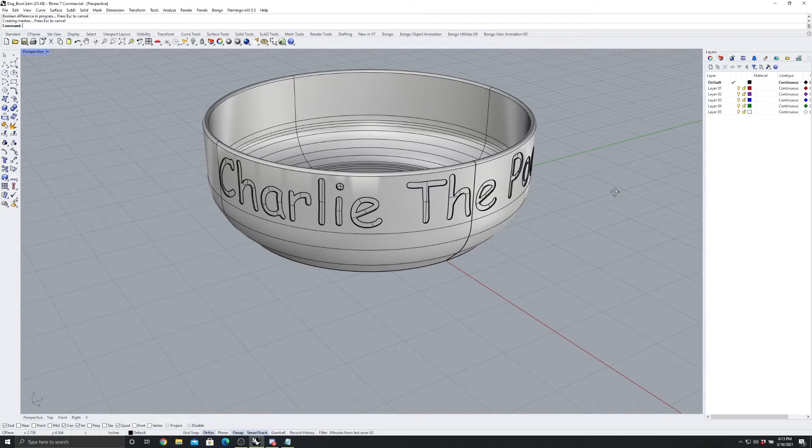Okay, so today I'm going to be making a 3D printable dog or cat bowl in Rhinoceros 3D. I want to include a custom name etched on the side, so if anybody wants to print their pet a new custom food or water bowl, all they have to do is follow this tutorial and they'll have the files they need to print one.

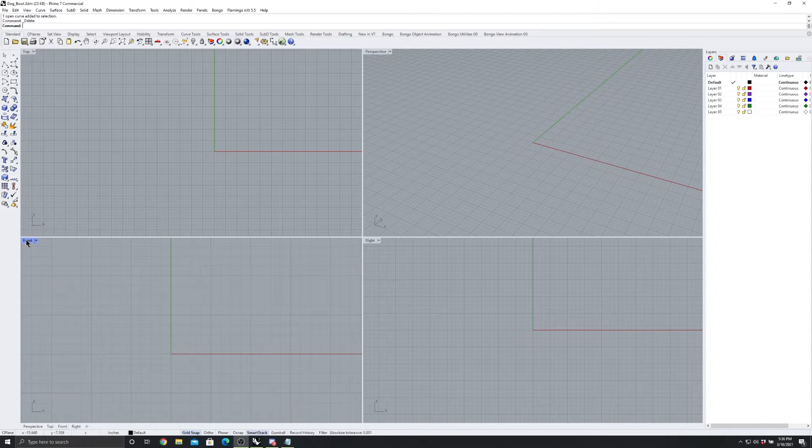I'm going to start by drawing half a cross section, so let's maximize our front view here. I want to make this bowl about 6 inches wide and 2 inches tall. I've got my graph plane set up in inches with 1/4 inch subunits. Let's start with a control point curve. So come up here and click control point curve. Start at the origin, and then I'd say about 2 inches over, make another point, and then another point.

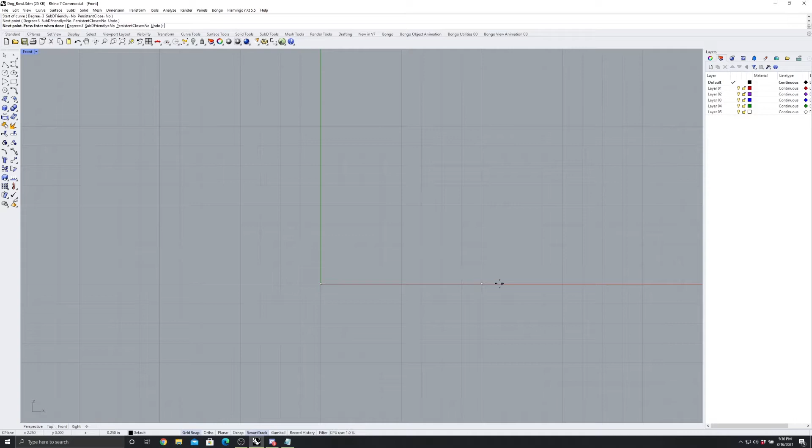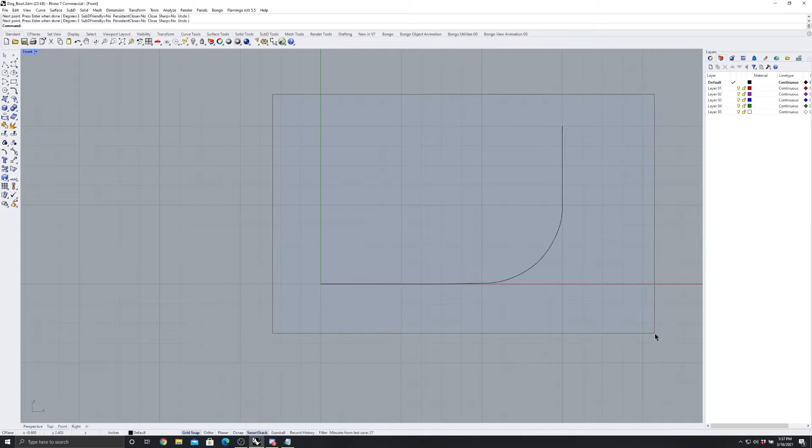Then come up about 1/2 inch over and 1/4 inch up. Then about here, and then I'm going to make 3 points in a row here, and then I'm going to bring it up to the top about 2 inches up. So let's press enter. So this is going to be the outer wall of my cross section. What I'm going to do next is offset this curve to my thickness. So come over here to curve, click offset, offset curve.

All right, so now it wants to know up here, side to offset, this side, and we've got to make sure the distance is what we want. I think 0.1 is what we want, and it's already set to that, but just to show you how to set it, all you have to do is type 0.1 and press enter. That sets this setting right here, and then you click which side of the line you want to offset. That creates two sides of this bowl, the inner surface and the outer surface.

I'm going to round this right here, and the easiest way to do that is to create a diameter circle. So hold down your circle menu button and then come over here and click circle, a diameter circle, making sure that your O-snap is enabled and your end feature of O-snap is enabled. Draw your diameter circle from end to end, like that.

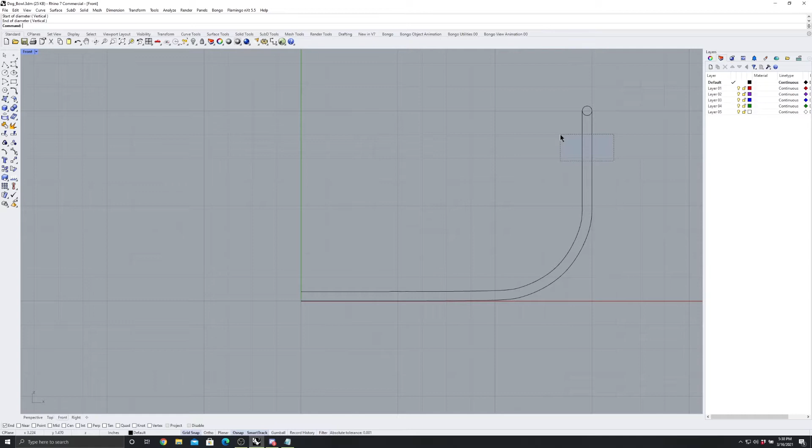And now, to get rid of that inner circle, select both of these lines, both the inner and outer wall of your cross section. Come over here and press trim, and then trim that half of the circle, and press enter. So, we now have a cross section of our bowl. If I were to use this cross section to create a bowl, it would come off looking great, but there's one problem. If I were to make a bowl from this cross section, I could not 3D print it. And the reason is this right here. This overhang right here is a problem.

You have to remember that when you're creating a 3D printed part, a 3D printer cannot print plastic onto thin air. And this overhang would present a problem if I were to try and have a 3D printer make this object. So I am going to reduce this overhang. I like to limit my overhangs to about 45 degrees. I know a lot of printers can go steeper than that, but I have always had success and have never really found it that significant a limiting factor to reduce my overhangs to about 45 degrees.

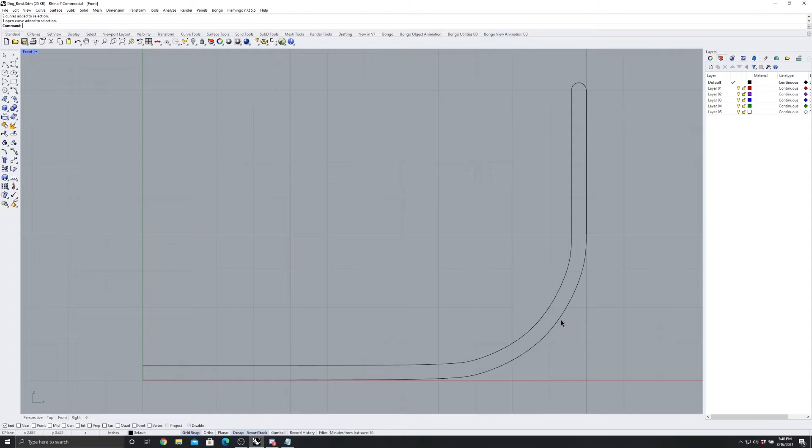This is the bottom, and I want to make sure that the steepness of this outer curve here, not the inner curve, but the outer curve, does not exceed 45 degrees. So how do I do that? I'm going to start by coming up here to Polyline, and I'm going to create a polyline that is at a 45 degree angle. And that's really simple to do. All you have to do is take one of these inch boxes and draw a line from corner to corner. That line is at 45 degrees.

And then come up here to move, and then select the end of this line. What we want to do is to combine it with the tangent of this line, but it's not snapping. And the reason is, if we come down to our O-snap menu, we have to click tangent object snap. Now when we bring our cursor over, it snaps directly to the tangent of this curve. And that's exactly what we want. I'm going to click.

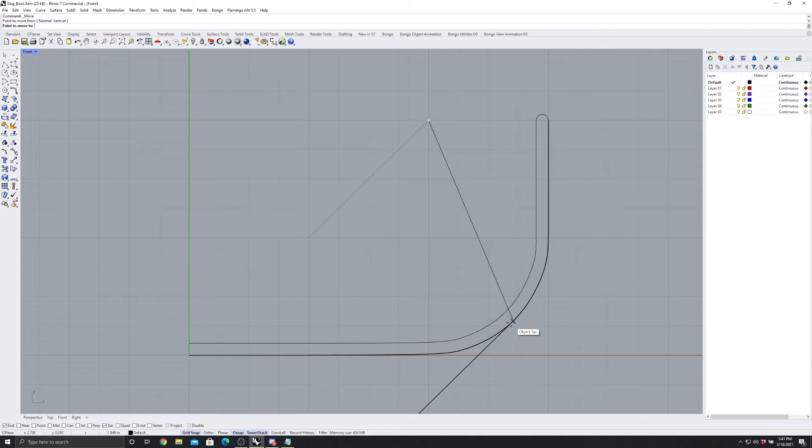Now we need to bring this line over and trim at this intersection here. How I'm going to do this is select this line here, and then I'm going to trim all of this away. I don't need it. I'm going to click Trim here, trim, and just completely get rid of that line.

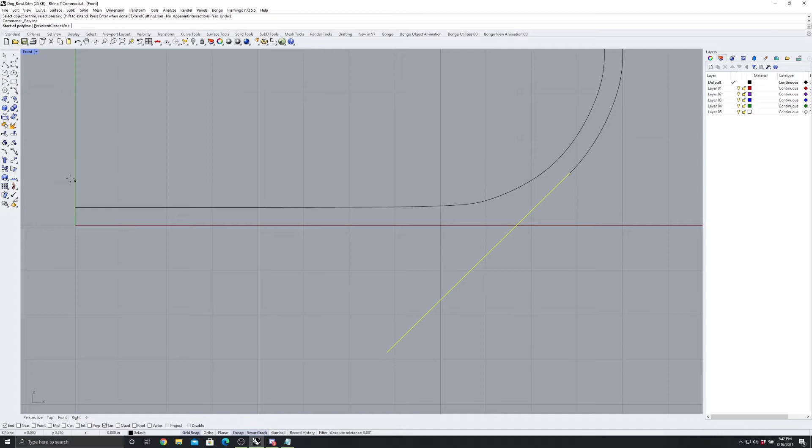And then I'm going to draw a new polyline by clicking here. I'm going to start at the origin and bring it over and past here so that these two lines intersect. Now I can trim them so that they join. I'm going to come over here and press Trim. I'm going to click here and click here.

Now what I've done to my cross section is, if I were to revolve this cross section into a 3D object, it would now be 3D printable because this overhang no longer exceeds 45 degrees. Let's turn this cross section into a solid line.

Right now it's not a solid line, it's in segments. You can select individual segments. Let's turn it into a solid line by coming over here and pressing Join. Now we have one solid cross section.

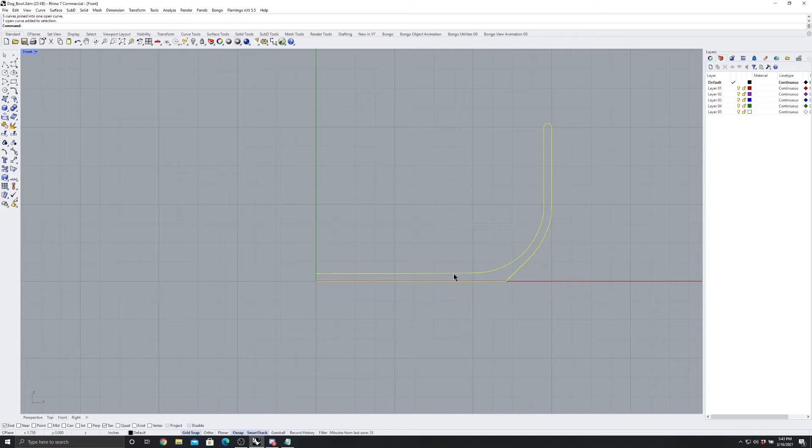Something that I forgot to mention is that when you are drawing the control points for this outer line here, make sure that this segment of the bowl right here is perfectly vertical. The reason is you're going to be etching letters into the side of the bowl, and keeping it vertical makes that process simple.

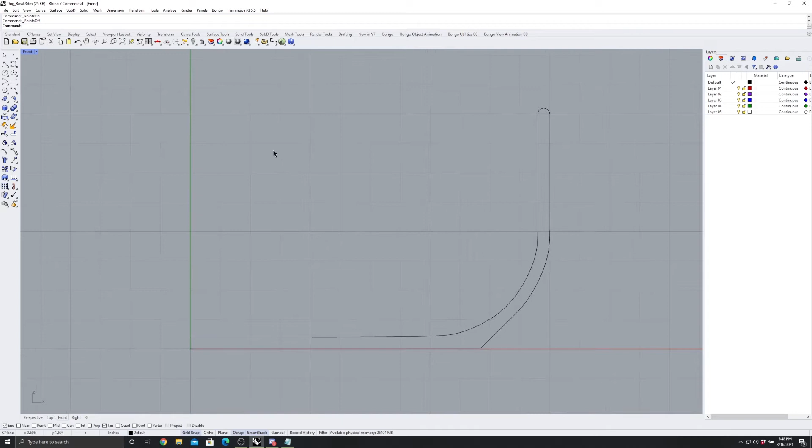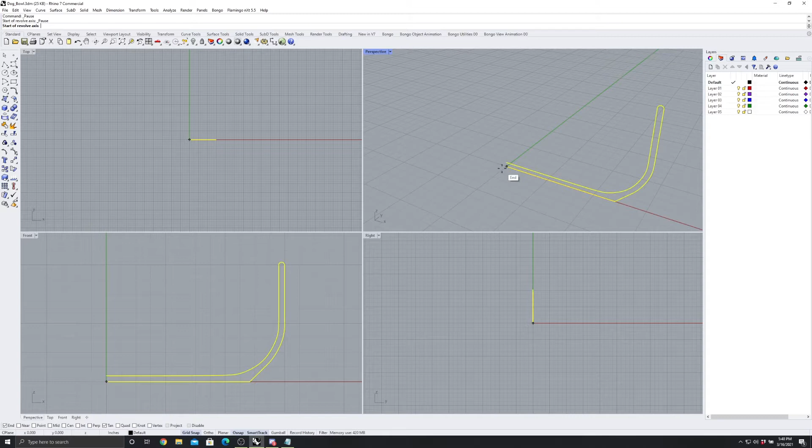Okay, the next step is to revolve this cross section. We're going to do that by exiting the front view and making sure our perspective view is easily visible. Then we're going to select our line, come up to Surface, and come down to Revolve. The first thing it's going to want you to do when revolving a polyline is to define the axis of rotation. So that's pretty easy to do.

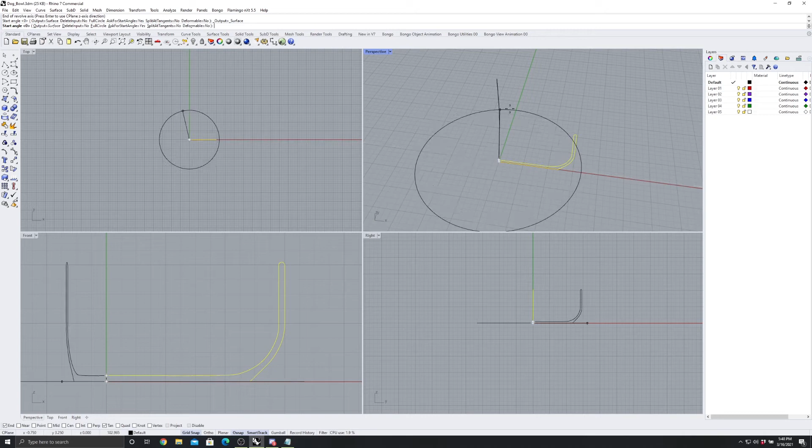Making sure that the end option is enabled in your OSnap, just select the two ends of this line right here. End, end. The next step is it wants you to define the starting angle of the rotation. By default, it should be 0. Mine is 0 by default here. But if yours is not, just press 0 and then enter.

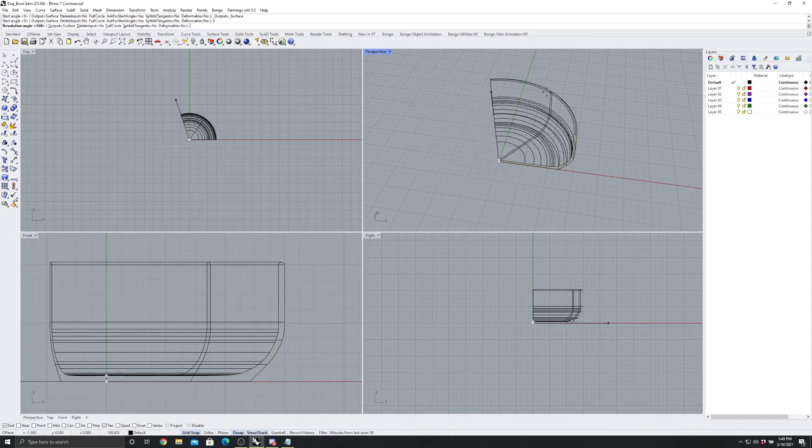Now it wants you to define the revolution angle. In other words, how much of a revolution do you want? We want a full revolution since we're making a bowl, not 3/4 of a bowl or half a bowl, but a full bowl. So we define our revolution angle as 360 degrees by punching in 360 and then enter. We now have our bowl in 3D space.

So that you can better see it, I am going to come up here and press Shade Viewport, making sure that my perspective viewport is selected. I'm going to click this button here, Shaded Viewport. Now you can clearly see the bowl we have just made.

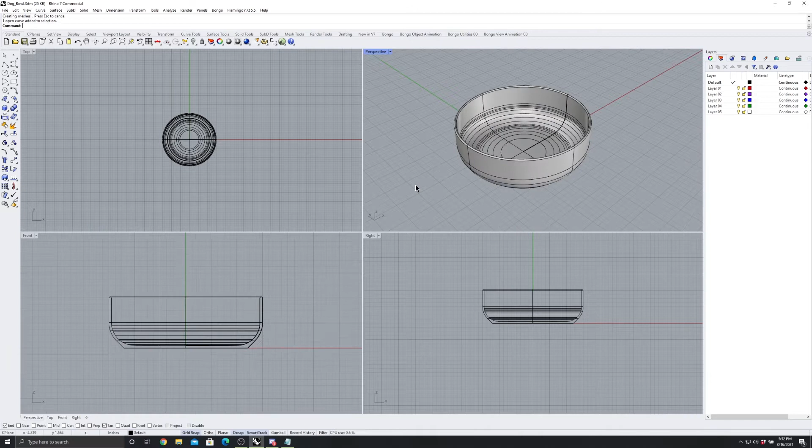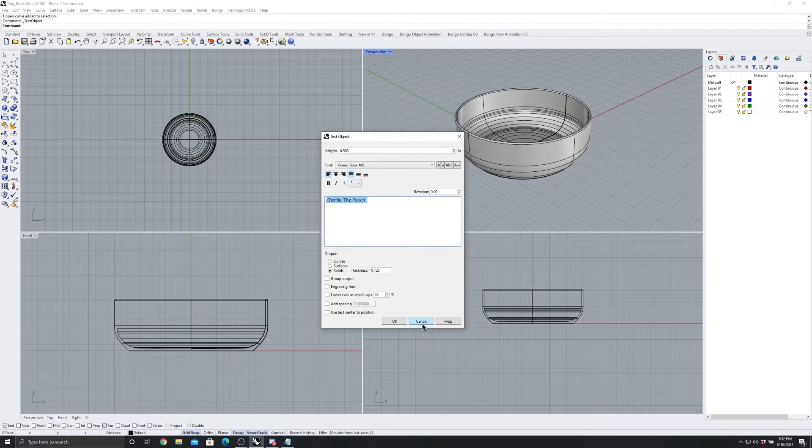The next step is to create our letters that we are going to etch into the side of this bowl. We do that by coming up to the Solid menu and pressing Text. In this menu, you can select a particular font and the height. This is important, the height of the letters. I'm going to cancel out of this and explain to you why height is important.

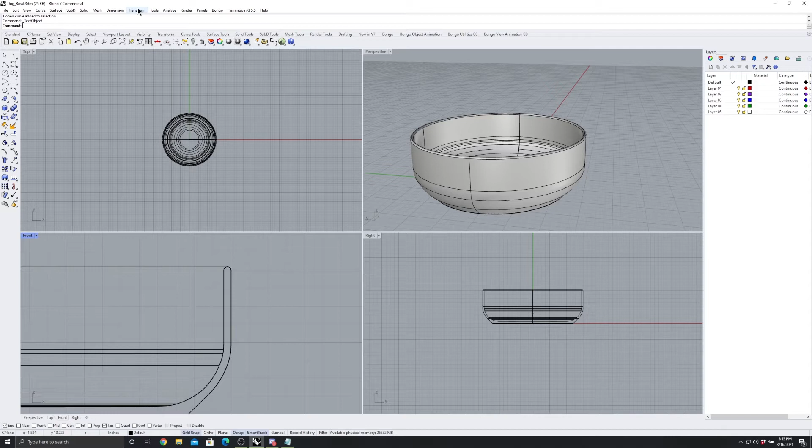This flat area of the bowl is 1 inch tall. You can tell by the graph it's a little under 1 inch tall. So we need to confine our letters in this flat area and not go any further below this point right here. Since it's 1 inch, to give us some space, I am going to make my letters about 3/4 of an inch tall. So come over to Solid, Text, and set the height to 0.75, 3/4 of an inch tall.

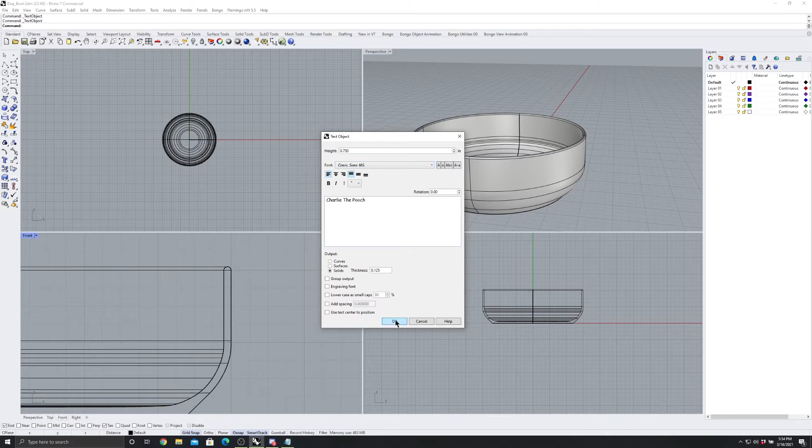For the name, I have Charlie the Pooch already set up here, so I think I'm going to keep that. For a font, I'm going to do Comic Sans. No particular reason, I just have to choose off the cuff. And now, as you can see, it has created our text in physical form. So let's place it really anywhere next to our bowl.

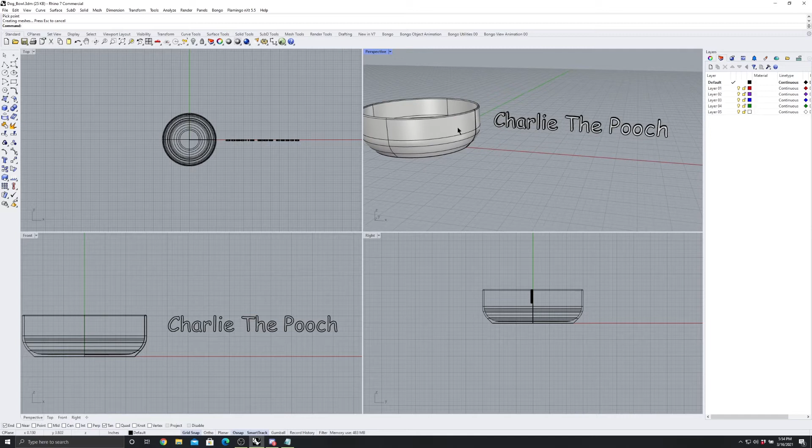If you come up here to the perspective, you can see our letters floating in space next to our bowl. The next step is going to be to bend them around the outside of the bowl and then subtract them from the surface of the bowl, in other words, etch them into the surface of the bowl.

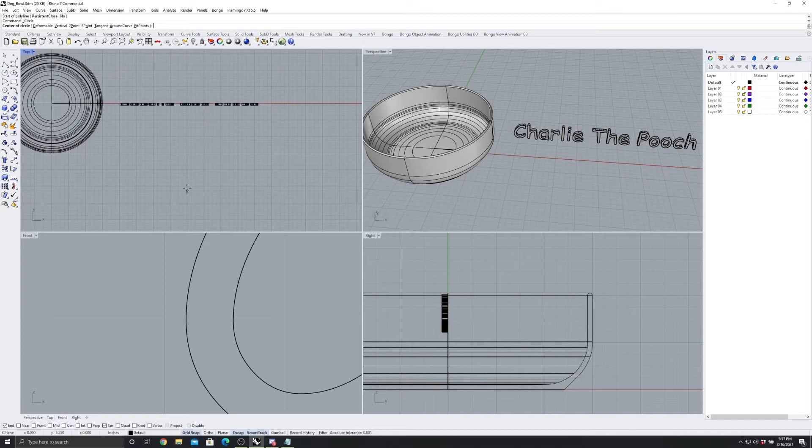In order to bend these letters around our bowl, we're going to need two pieces of information. We need to know the outside diameter of this bowl. I happen to know that it is exactly 6 inches, since I drew the cross section exactly 3 inches from the middle. 3 times 2 is 6. So let us draw a circle that is exactly 6 inches in diameter.

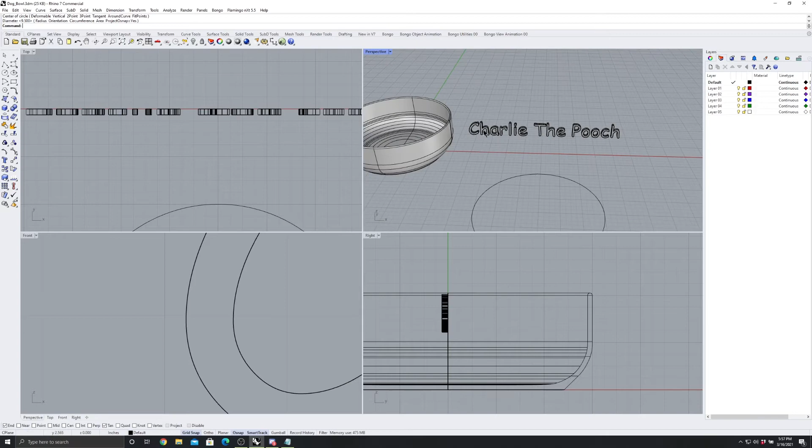The next bit of information we need is the exact length of these letters. This is a little bit tricky because you need to capture the furthest point of the right side of the H here and the furthest point on the left side of the C here, determine that length, and draw a line that represents it.

So I'm going to come over here to Polyline and switch to the top view. I'm going to draw lines that come out from the furthest points on both the C over here and the H over here. I like to use the Quadrant object snap feature of OSnap for this. So let's select that.

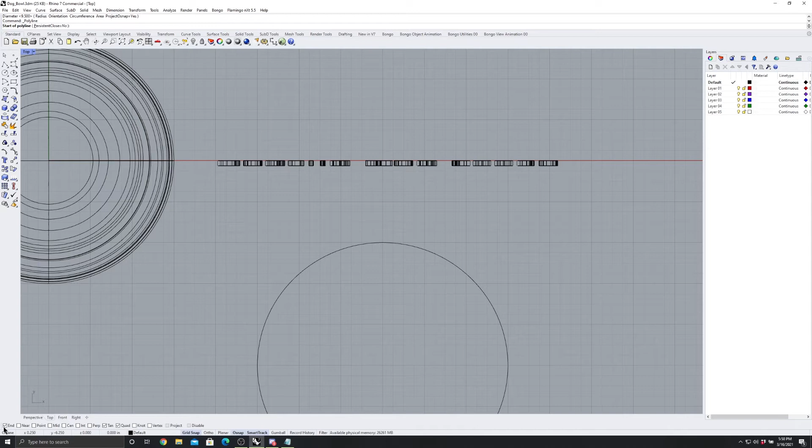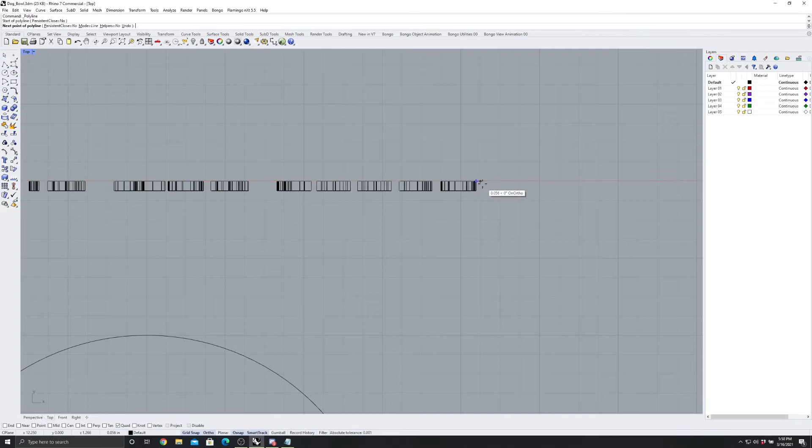I'll unselect end and tangent because I don't want to accidentally select anywhere else. If you come here, Quadrant will grab that exact point, the furthest point right on the H. Let's grab that point, and with ortho enabled, bring a line out to about 3/4 away from the origin. Then over here, let's do the exact same thing, using our quadrant feature, draw a line about 3/4 away from the origin plane. So now we've drawn two lines that represent the entire length of these words.

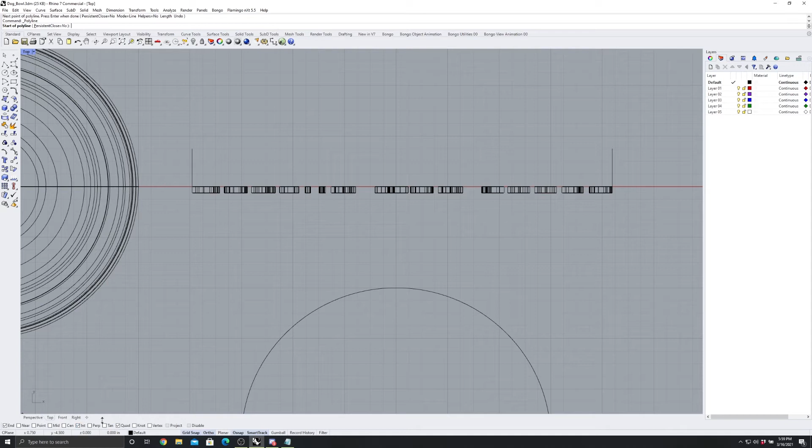Now what we need is a line that is an accurate length between these 2 points, and that's quite simple. You draw a polyline up here. Make sure your end feature is enabled in OSnap, and also intersection object snap is enabled. Then from the end of this line, come over - for this part I am not going to use end, I'm going to make sure I use intersection or apparent intersection, and click.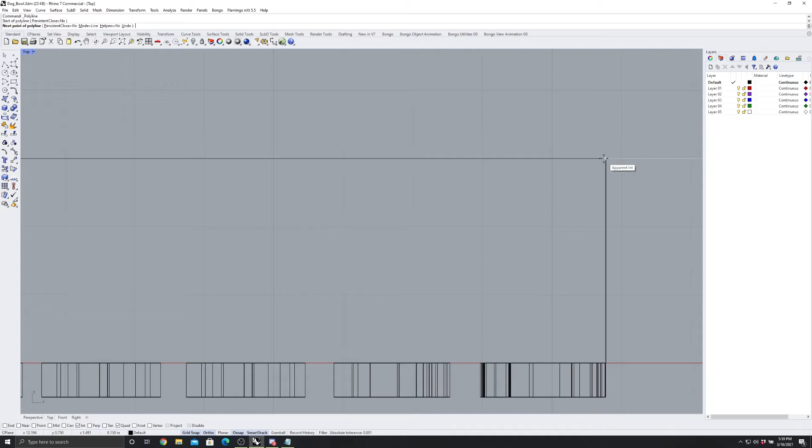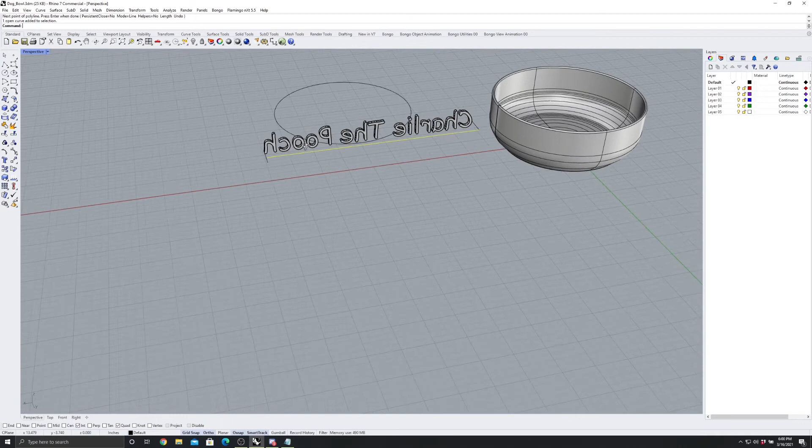Now, if I exit my top perspective and enter my universal perspective, I can see that this line here that I just drew perfectly represents the total length of these letters. So I now have the two pieces of information I need to start the bend.

I'm going to delete these lines since I no longer need them. Then I'm going to bring this line over, and move the end of this line, with my quadrant re-enabled. Just to be clear, what quadrant does is allow you to snap to 4 locations on this circle where it is parallel with the X and Y plane. You see how that works? It won't let me snap anywhere except here, here, and here - that is what quadrant does. Now I'm going to bring it down here, this is where I want to connect it.

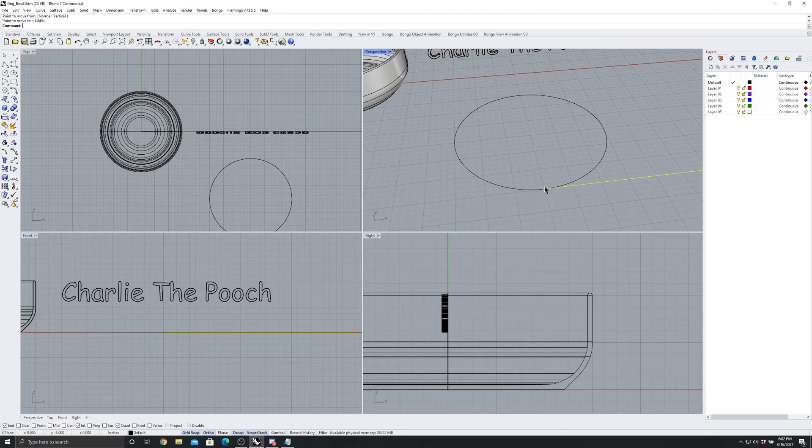Now what I need to do is determine the length of this line. I know the length of this line matches these letters over here, but I do not know exactly what that length is. To figure that out, you select it, come up here to Analyze, click Length, and it tells you exactly its length, 8.15 inches.

So in order to bend these, we need to create an arc here that is exactly the same length as this line, but along this circle rather than straight. I'll explain why this is important in a second, but for now let's create that arc by coming over to Arc, click it, and then we need to create the origin of our arc in the exact center of the circle, which is this point right here.

It just happens to be aligned with the graph, but if it wasn't, you can come down here to OSnap and click center, and that will allow you to snap to the center of any circle. If I come up next to the circle wall here, it snaps directly to the center of the circle. It's a very useful feature.

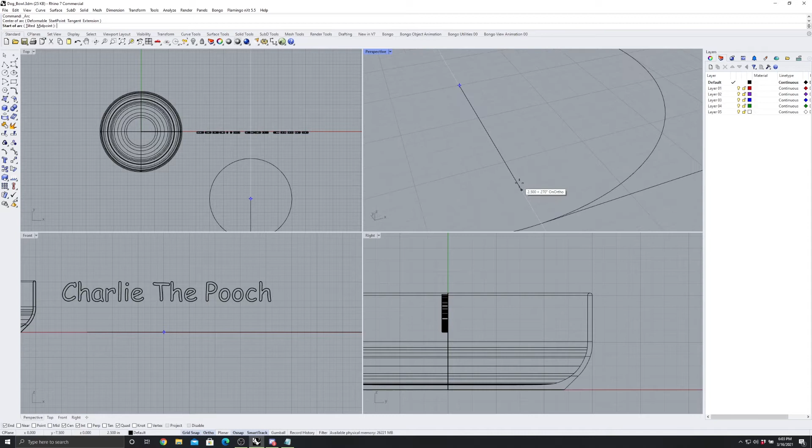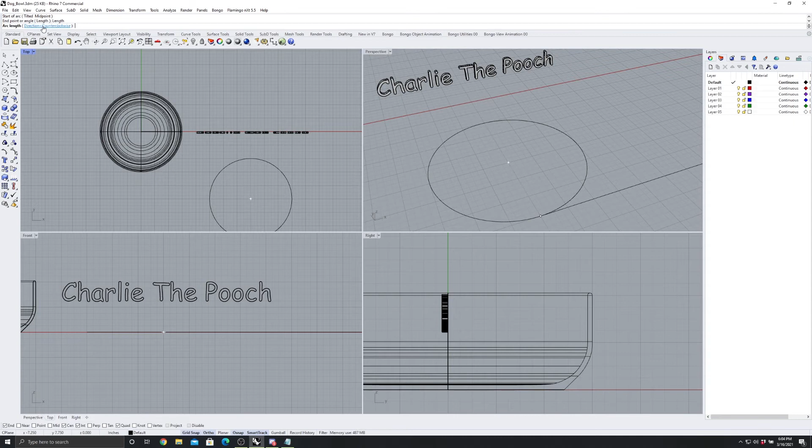Now, what we're doing here is defining the radius of the arc I'm about to create. The radius always comes from the center of a circle out to the side here - that is our radius, exactly 2.5 inches long. Now, the arc feature in this program is very useful because instead of defining the angle, 90 degrees, 180 degrees, you can give it an exact length. Let's click this length feature and type in the exact length of this line, which was 8.150 inches long, and press enter.

Now you can't see the arc because this circle is blocking it, but I don't need this circle anymore, so I'll get rid of it. There is our arc. This arced line and this straight line are exactly the same length.

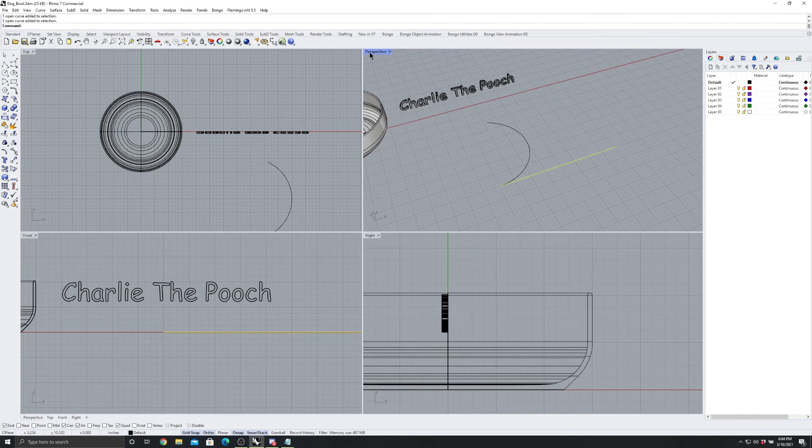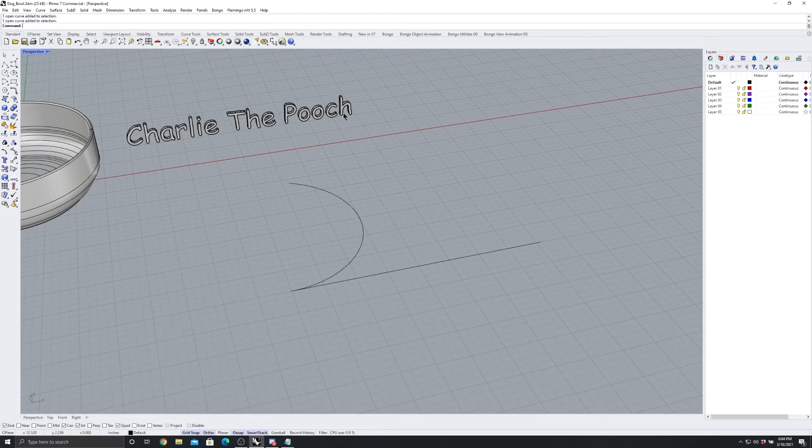Why I need these two lines is very important to the bend feature in this program. I'm going to maximize perspective so you can see this better. What these represent are where the spine of the bend is going to start and where the spine of the bend is going to end. I'm going to use these lines to perfectly define my bend and ensure that when I bend these letters, they will perfectly wrap around the outside surface of this bowl.

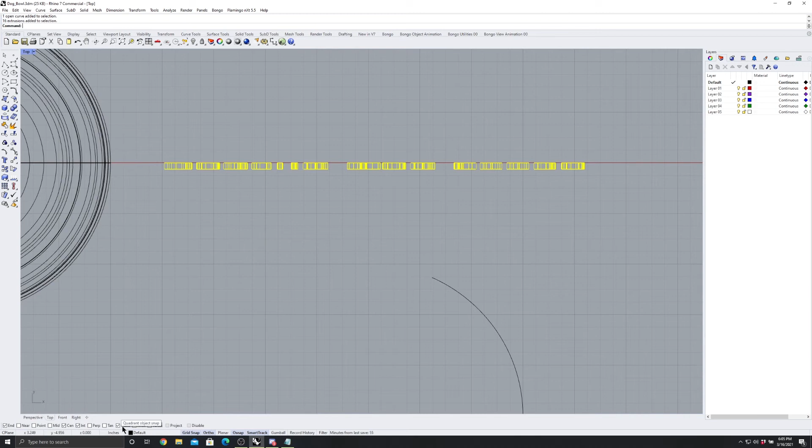So let us do that. Let me demonstrate the bend feature by exiting the perspective window and coming to the top window. I'm going to grab the furthest to the left point using my quad feature. I'm going to come up here to Transform, Move, and then select this corner here. I've got to be careful - I do not want end, and I do not want intersect or center for that matter. I'm just going to leave quad enabled, quadrant.

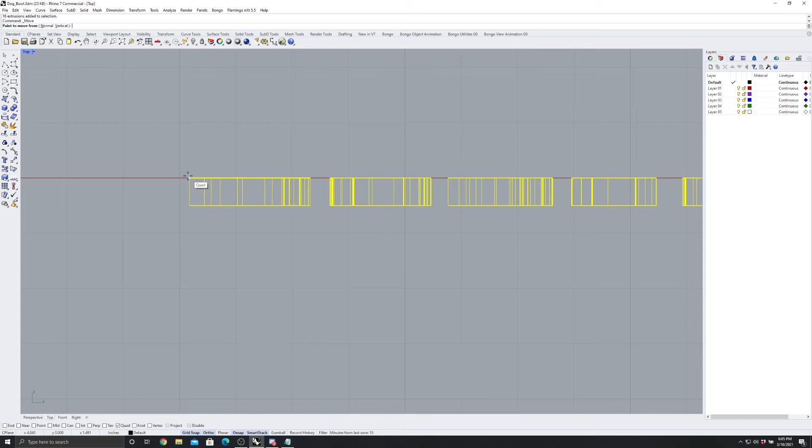I'm going to select the quadrant of this letter, which I happen to know is the furthest point to the left of this entire string of letters. Click, and I'm going to move it to this intersection of the two lines I drew.

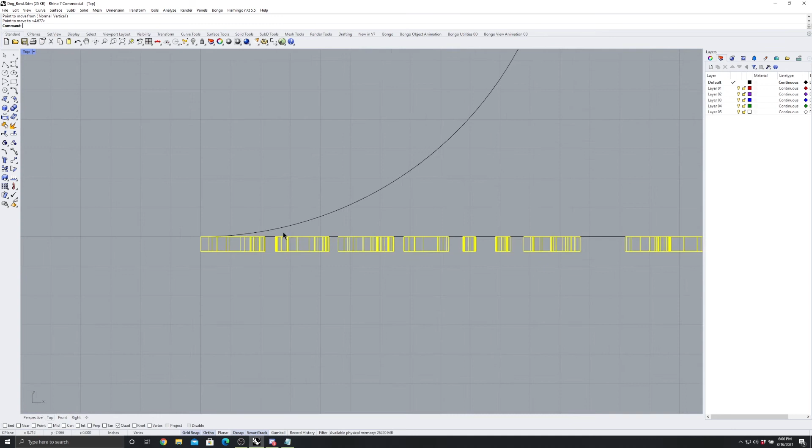Now, before I bend it, I have to consider something. How far do I want these letters to etch into this bowl? What is the depth of the etch? It's got to be very shallow because you do not want to create a perfectly flat overhang that a 3D printer can't manage. I'll explain what I mean by that in a second.

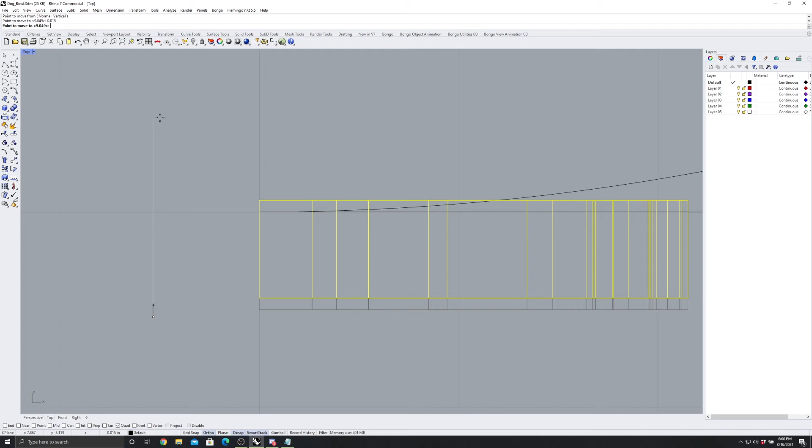Let's see, I'm going to go with a value that is really small, that will show up but will not create a problem for our 3D printer. I'm going to get rid of grid snap and enable ortho snap. Probably about 0.015, I'd say. So instead of trying to click on 0.015, I'm going to type in 0.015 and press enter. Now, with ortho enabled, I will essentially move these letters back 0.015. They should be 0.015 inches in from this line here where it started.

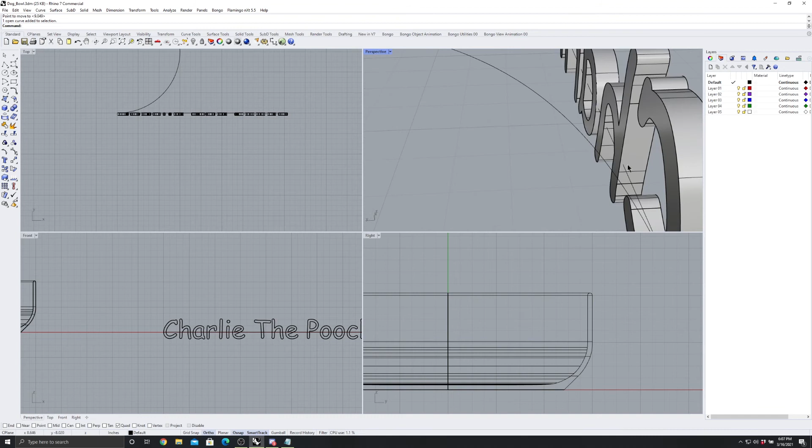So I'm going to move back to 3D space and show you what that means from this perspective so you may understand better. You'll notice that I moved the sides of these letters in this little amount here, which is 0.015 inward. All right, now I'm going to go back to top and we're going to commence the bend.

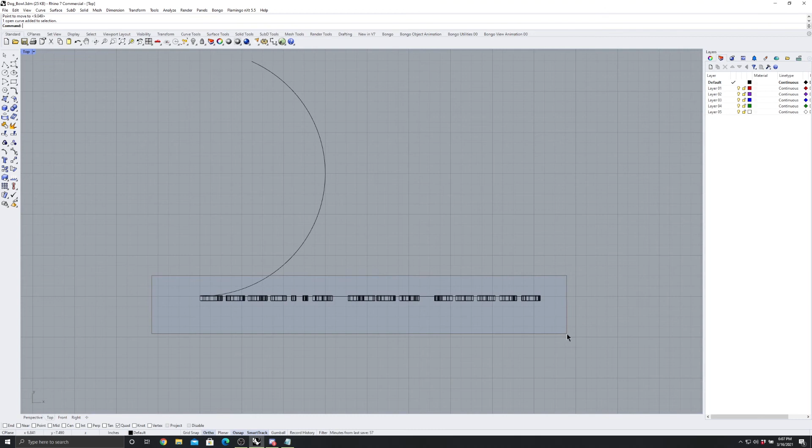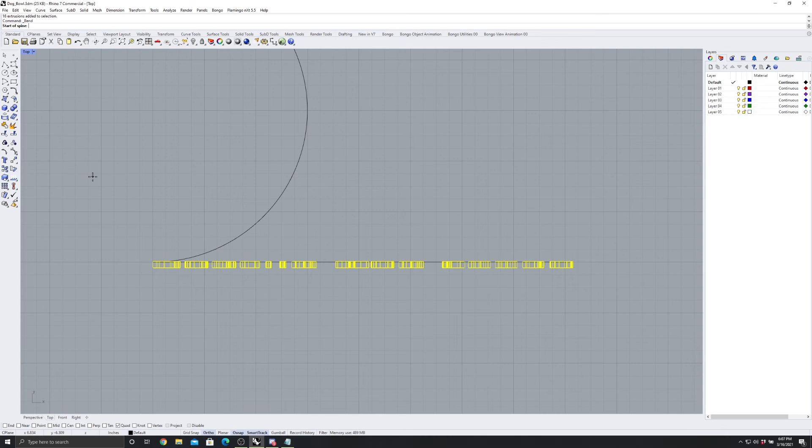I'm going to select the letters and not the lines, just the letters only. And then I'm going to come up here to transform, bend, and what it wants to know first is the start of the spine. And it wants, in particular, the start of the initial spine, the spine when it's straight. So that'll be right here where these two lines intersect.

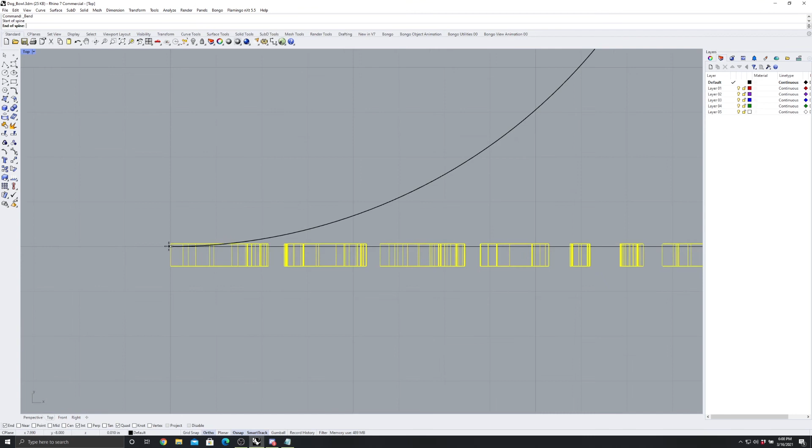And let us enable intersect. I think it did it automatically, but let's just make sure it's enabled. Either end or intersect will work for this. Click. And now it wants to know the end of the spine, the initial spine. And that'll be the far end of this straight line here, right there. Click.

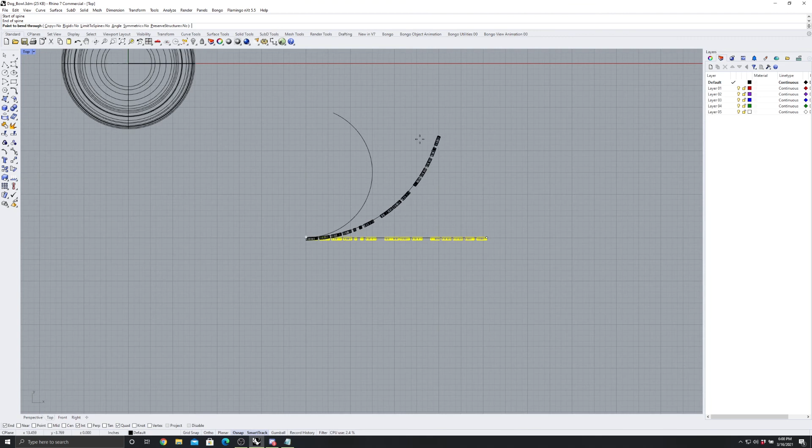Now disable ortho, and you will notice that it's starting to bend. From the top, the letters are starting to bend. Now, you can see why I drew this curve here. It allows me to just come up here, making sure my end feature is enabled in OSNAP. I can click the end right there, and I have successfully bent my letters.

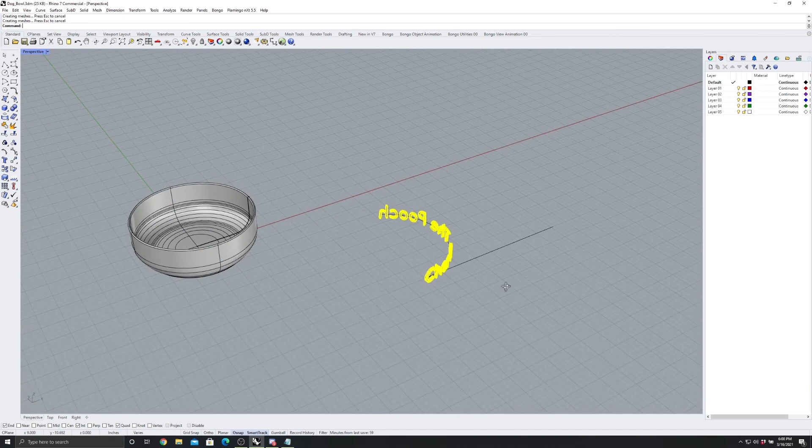If I go back to perspective view, there you go. There are my letters. They're perfectly bent, and the curve will perfectly match the wall of this bowl here.

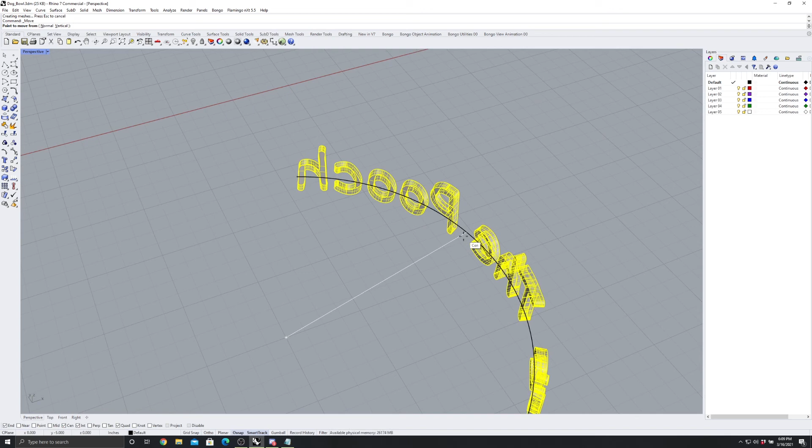And all I have to do to move them in place is to move from, making sure center is enabled, the center of this curve here, the radius from the beginning of the radius of this curve to the center of the bowl. And instead of clicking it from here, well, I guess I can't click it here. That's the exact center of the bowl right there.

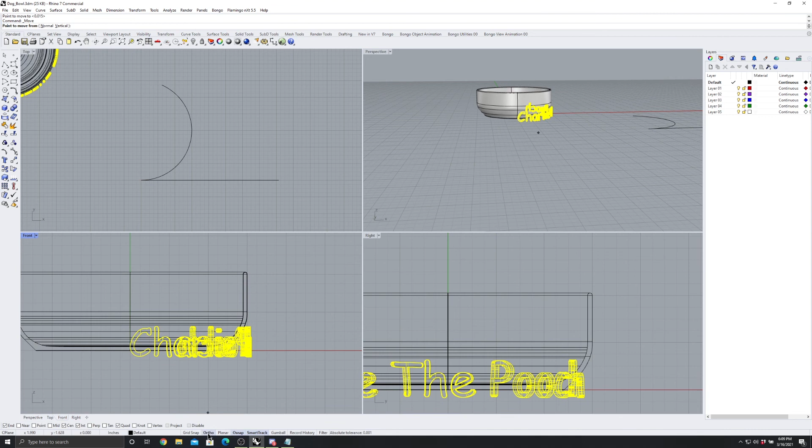Now I've got to move them up, so I'm going to exit perspective, and from the side view I'm going to move them up. I'm going to leave grid snap off, and turn on ortho. I'm going to move them up until they sit right about where I want, right in the middle of this flat area.

And there you go. We have now placed the letters on the side of the bowl, and they are ready to be etched out of the bowl.

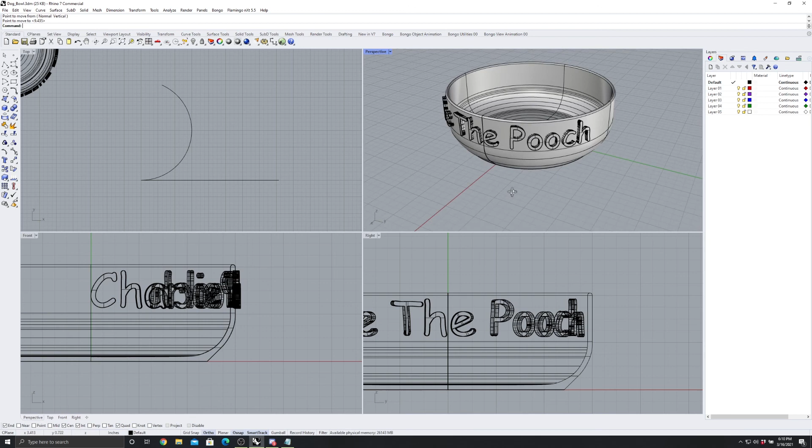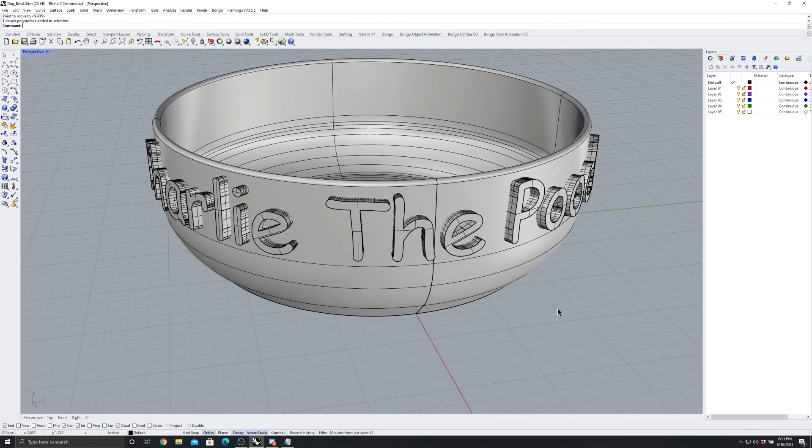Etching or differencing these letters into this bowl is very simple. Something I want you to pay attention to is notice how these letters are sticking into the bowl a slight distance. In fact, they are sticking into that bowl exactly 0.015 inches.

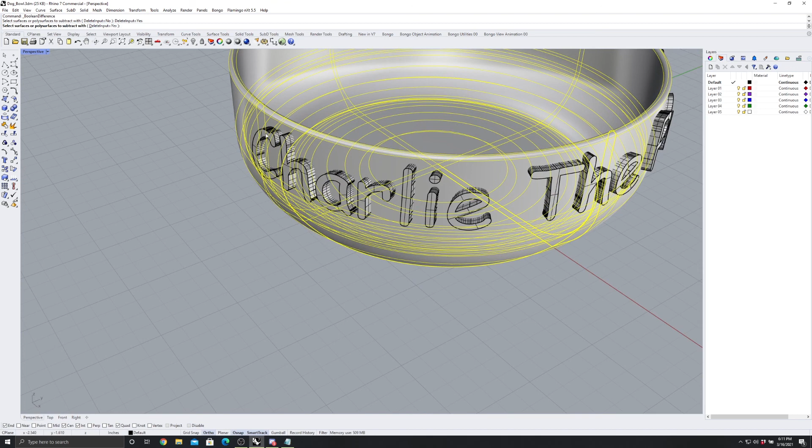So, in order to difference them, all I have to do is select my solid, the solid I want to keep, and come up here to solid and press difference. I do want to delete my input. You'll see what that means in a second. My input that I will be deleting will be the solids that I'm using to difference from my bowl, which will be each of these letters.

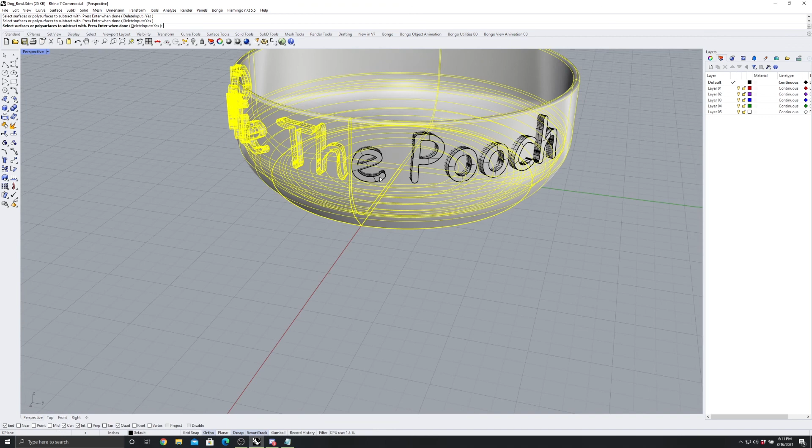So let's select them one by one. It wants you to select surfaces or poly surfaces to subtract with, and what it means by that is these letters. Here we go. Oop, make sure I dot my I's. Once you have your input selected, press enter.

And there you go. The letters are now etched into the side of the bowl. This bowl is done. It's got its custom name etched into the side.

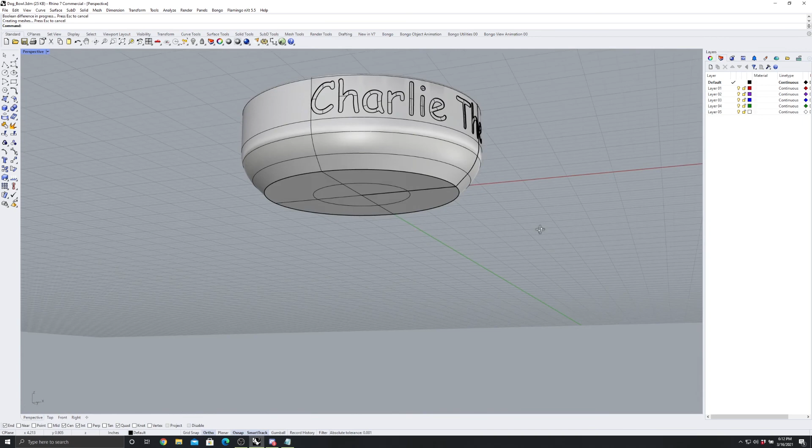You can see from the bottom that it has this 45-degree slant, and there is no steep overhang at the base here. It'll sit flat on any surface. It is perfectly 3D printable.